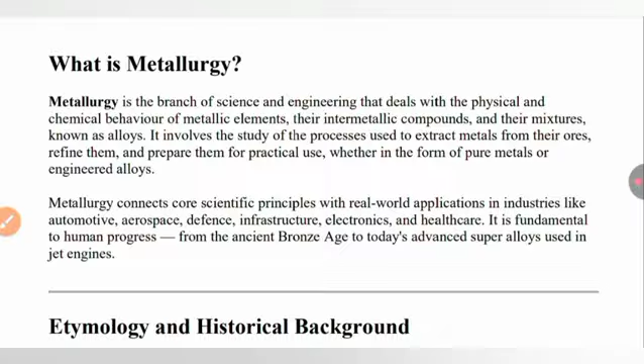Metallurgy connects core scientific principles with real world applications in industries like automotive, aerospace, defense, infrastructure, electronics, and healthcare. It is fundamental to human progress, from the ancient Bronze Age to today's advanced superalloys used in jet engines.

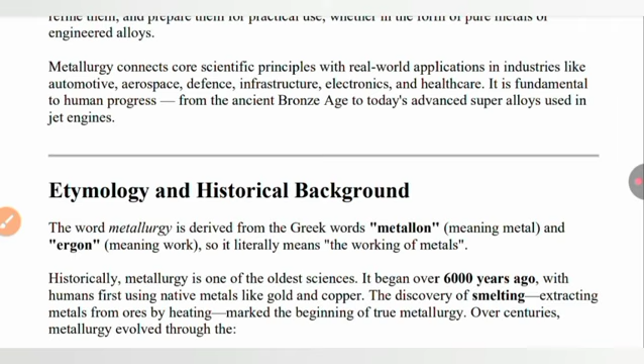Now we are going to see the historical background. The word metallurgy is derived from the Greek word metallon, meaning metal, and ergon, meaning work. So that means the working of metal. Historically, metallurgy is one of the oldest sciences. It began over 6,000 years ago with humans first using native metals like gold and copper.

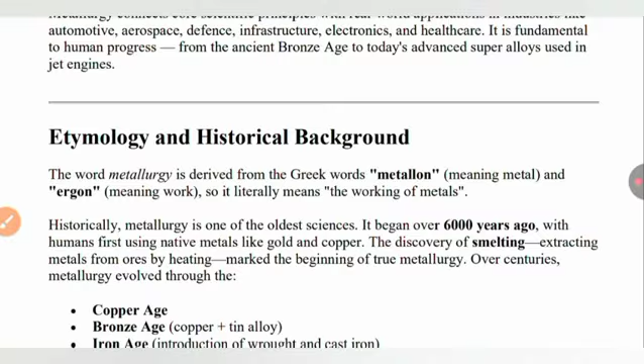The discovery of smelting, so what do you mean by smelting? Extracting metals from ores by heating, marked the beginning of true metallurgy. Over centuries, metallurgy evolved through the Copper Age, Bronze Age, then Iron Age, Steel Age, and modern metallurgy.

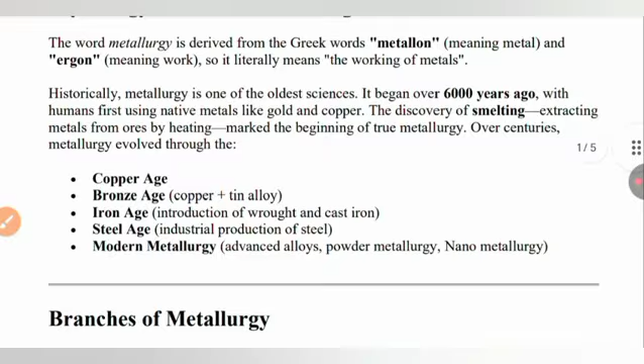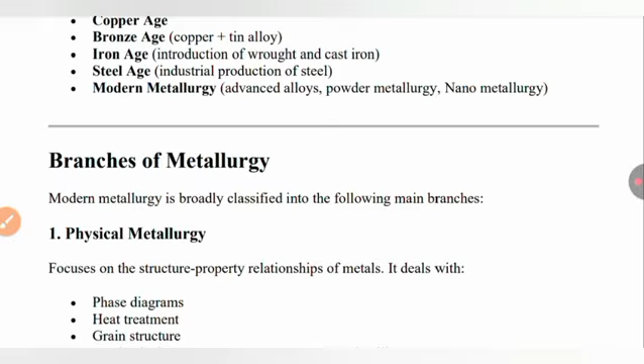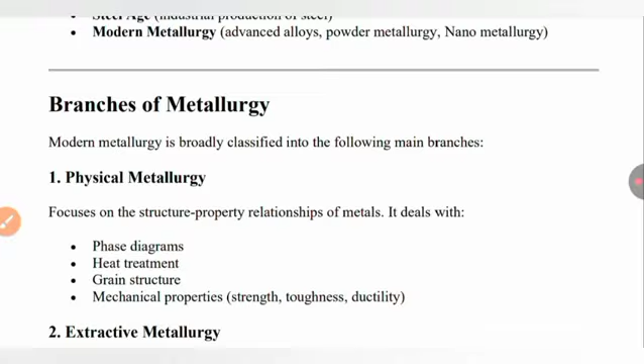Now, we are going to see the branches of metallurgy. It is subdivided into the following types. The first is physical metallurgy. It focuses on the structure-property relationships of metals and deals with phase diagrams, heat treatment, grain structure, and mechanical properties that include strength, toughness, and ductility.

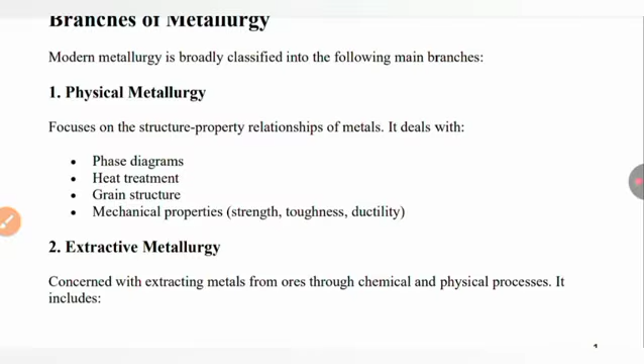The second type of metallurgy is extractive metallurgy, extracting metals from ores through chemical and physical processes. It includes pyrometallurgy, high temperature methods; hydrometallurgy, chemical leaching using aqueous solutions; and third is electrometallurgy, using electrical energy.

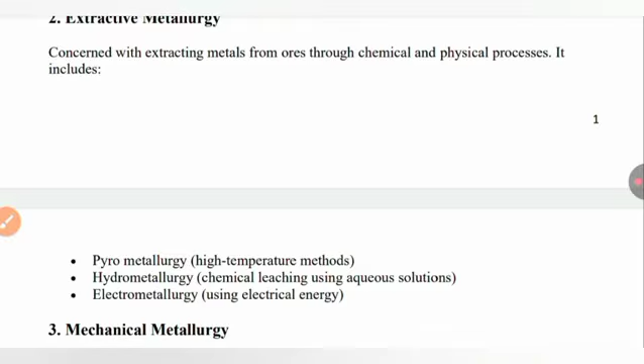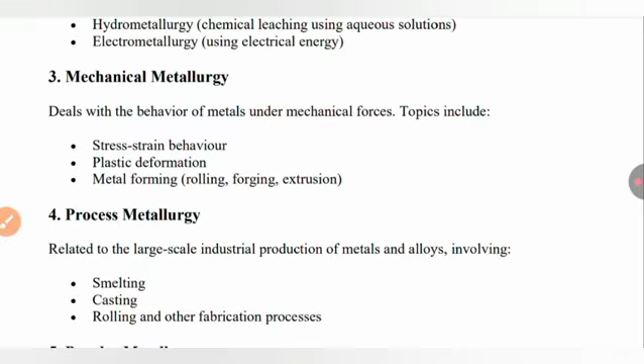Now, the third type is mechanical metallurgy. It deals with the behavior of metals under mechanical forces. This includes stress strain behavior, plastic deformation, and metal forming, which includes rolling, forging, and extrusion. Now, the fourth type is process metallurgy, related to the large scale industrial production of metals and alloys involving smelting, casting, rolling, and other fabrication processes.

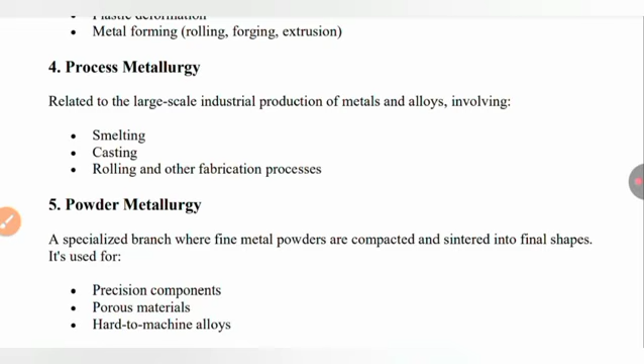Now, the fifth type is powder metallurgy, a specialized branch where fine metal powders are compacted and sintered into final shapes. It is used for precision components, porous materials, and hard to machine alloys.

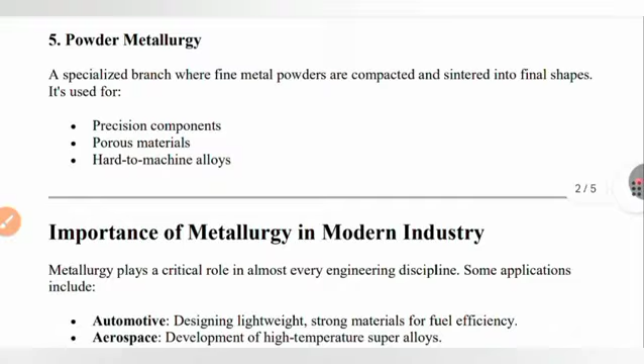Then, the importance of metallurgy in modern industry. Metallurgy plays a critical role in almost every engineering discipline. Some applications include: the first is automotive, designing lightweight, strong materials for fuel efficiency. Second is aerospace, development of high temperature superalloys. Third is defense, armor materials, corrosion resistance in harsh environments.

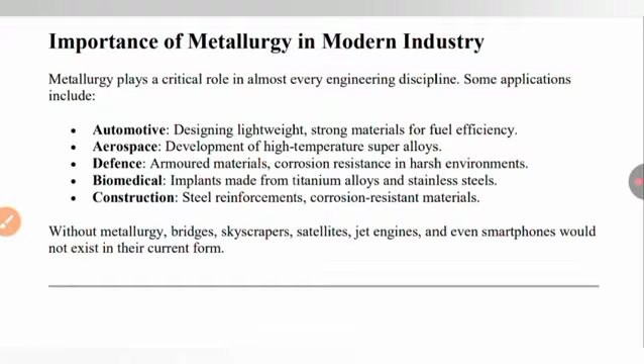Fourth is biomedical, implants made from titanium alloys and stainless steels. Fifth is construction, steel reinforcements, corrosion resistant materials. Without metallurgy, bridges, skyscrapers, satellites, jet engines, and even smartphones would not exist in their current form.

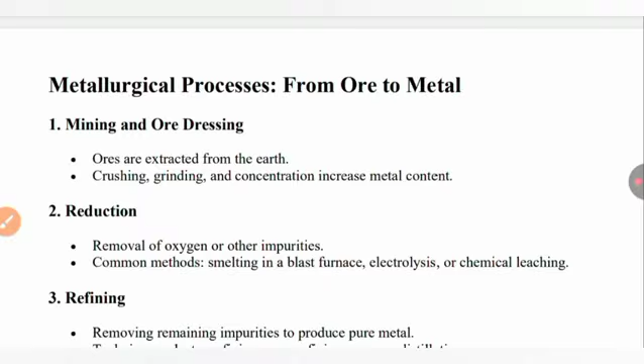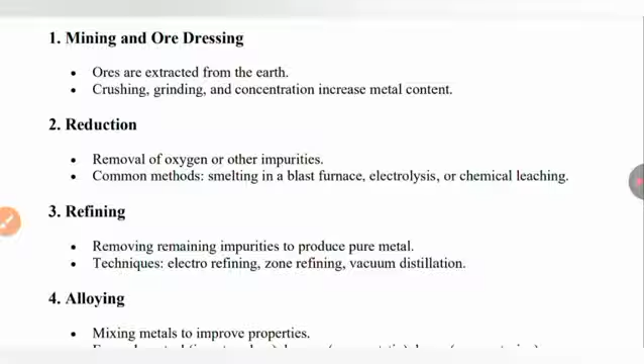Third is refining, removing remaining impurities to produce pure metals. Techniques used in refining are electro refining, zone refining, and vacuum distillation. Then fourth is alloying, mixing metals to improve properties. Some examples: steel is made up of iron and carbon. Bronze is made up of copper and tin. Brass is made up of copper and zinc.

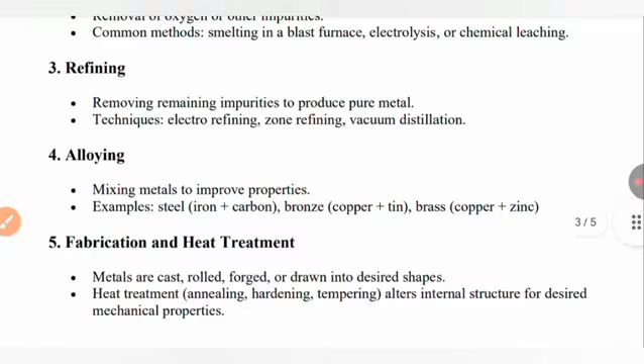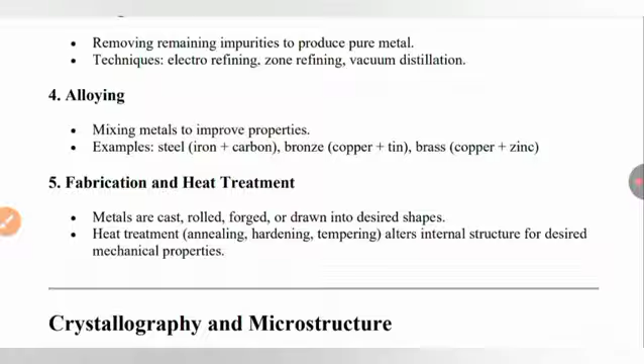Then fifth is fabrication and heat treatment. Metals are cast, rolled, forged, or drawn into the desired shape. Heat treatment, which includes annealing, hardening, and tempering, alters the internal structure for desired mechanical properties.

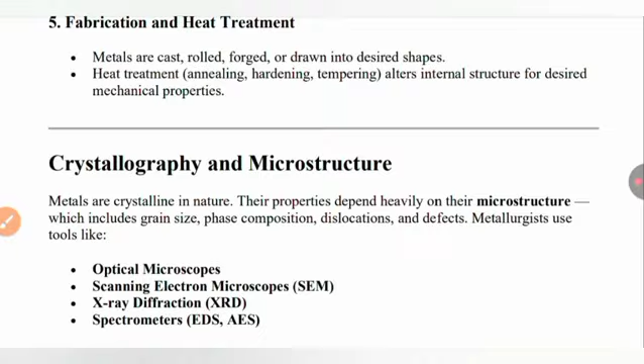Next point is crystallography and microstructure. Metals are crystalline in nature, and their properties depend heavily on their microstructure, which includes grain size, phase composition, dislocations, and defects. Metallurgists use tools like optical microscopes, scanning electron microscopes, X-ray diffraction, and spectrometers. Understanding and controlling the microstructure is the key to tailoring material strength, toughness, and corrosion resistance.

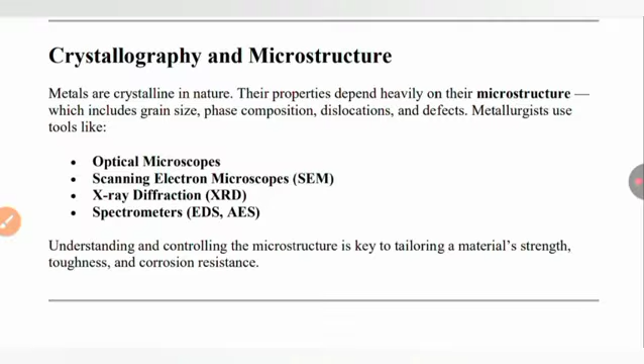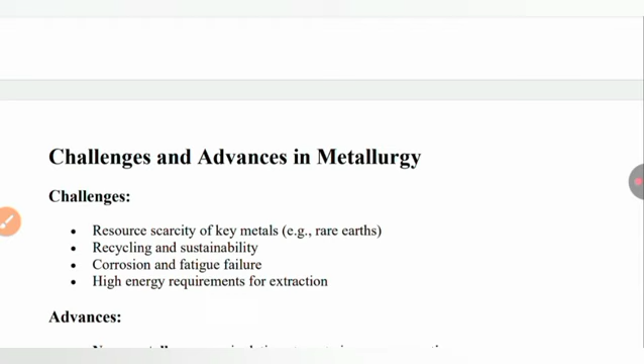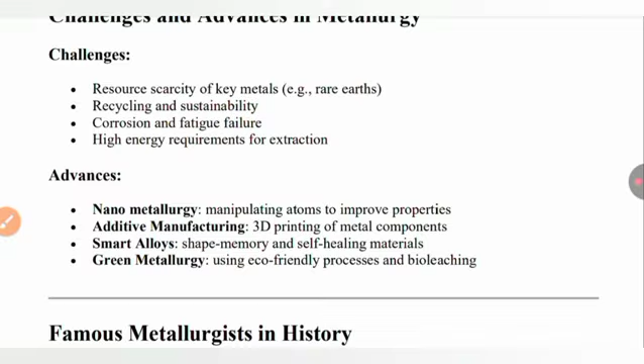Now next, challenges and advances in metallurgy. Some challenges are resource scarcity of key metals, that is rare earths, recycling and sustainability, corrosion and fatigue failure, and high energy requirements for extraction. Then advances: nanometallurgy, manipulating atoms to improve properties; additive manufacturing, 3D printing of metal components; smart alloys, shape memory and self-healing materials. Then green metallurgy, using eco-friendly processes and bioleaching.

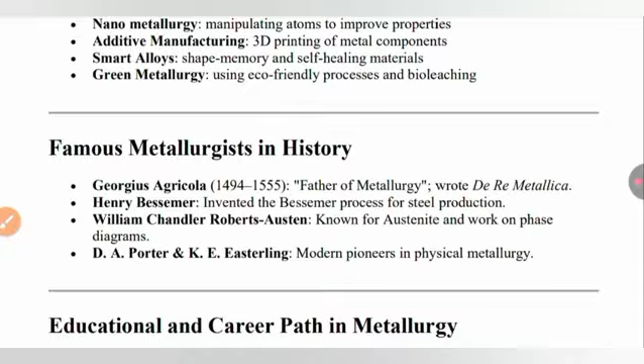Famous metallurgists in history: Georgius Agricola, 1494 to 1555, father of metallurgy, wrote De Re Metallica. Henry Bessemer invented the Bessemer process for steel production. William Chandler Roberts-Austen, known for austenite and work on phase diagrams. D. A. Porter and K. E. Easterling, modern pioneers in physical metallurgy.

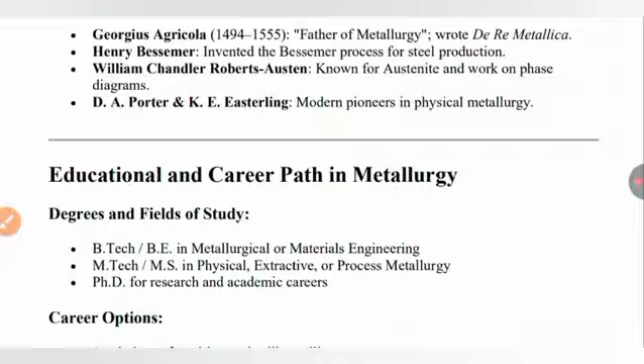Educational and career path in metallurgy. Some degrees in the field of metallurgy are BE or BTech in metallurgical or materials engineering, then MTech or MS in physical, extractive or process metallurgy, and PhD for research and academic careers. Some career options are steel plants, foundries, and rolling mills; aerospace, automotive, and defense sectors; research labs and metallurgical consultancy; non-destructive testing and failure analysis; quality control, welding, and corrosion engineering.

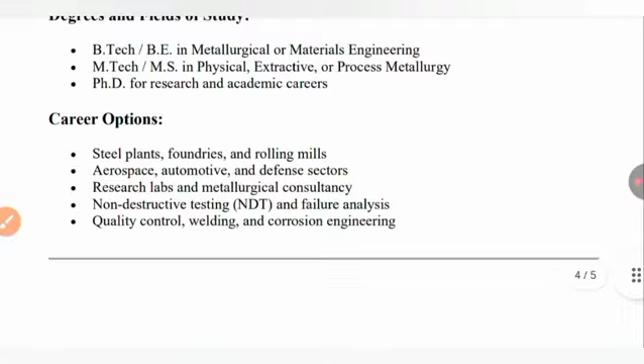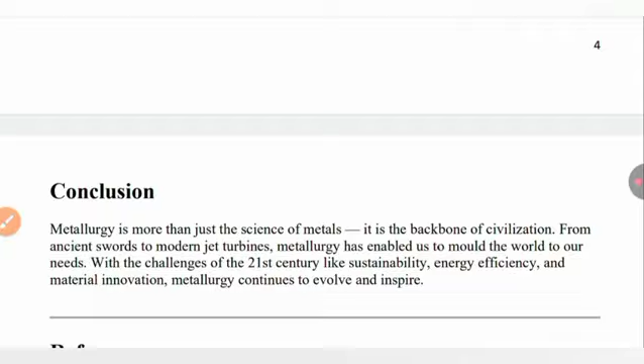Conclusion: metallurgy is more than just the science of metals. It is the backbone of civilization, from ancient swords to modern jet turbines. Metallurgy has enabled us to mold the world to our needs. With the challenges of the 21st century like sustainability, energy efficiency, and material innovation, metallurgy continues to evolve and inspire.